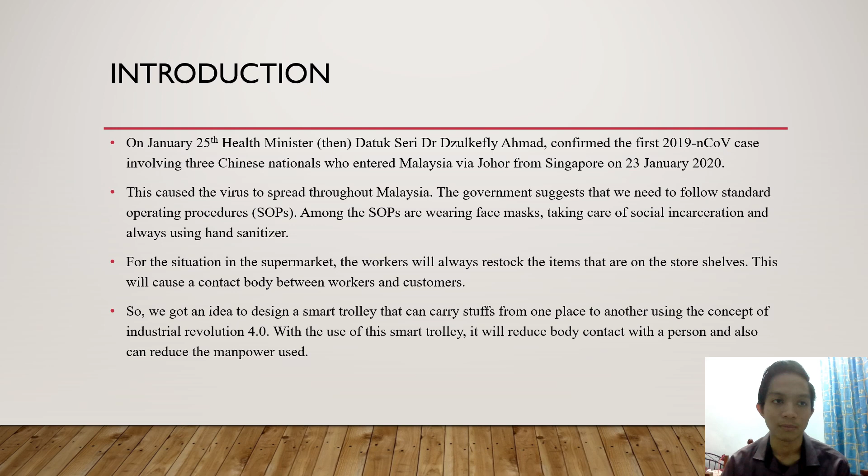So we got an idea to design a smart trolley that can carry stuff from one place to another using the concept of Industrial Revolution 4.0. With the use of this smart trolley, it will reduce body contact with a person and also can reduce manpower use. Next, the background of the problem.

In this era of modernization, most people use tools to facilitate their lives in all aspects. Humans are always looking for something to help do the heavy and difficult work in their daily affairs. Because of this, trolleys were built to help reduce the use of manpower when lifting and moving heavy goods from one place to another.

In addition, the history of the creation of the first trolley occurred in the United States when people there had difficulty carrying goods. A man named Sylvan Nathan Goldman is the creator of this trolley. Furthermore, until today, there are various types of trolleys available in the market, such as supermarket trolleys, freight trolleys, gas canister trolleys, and others.

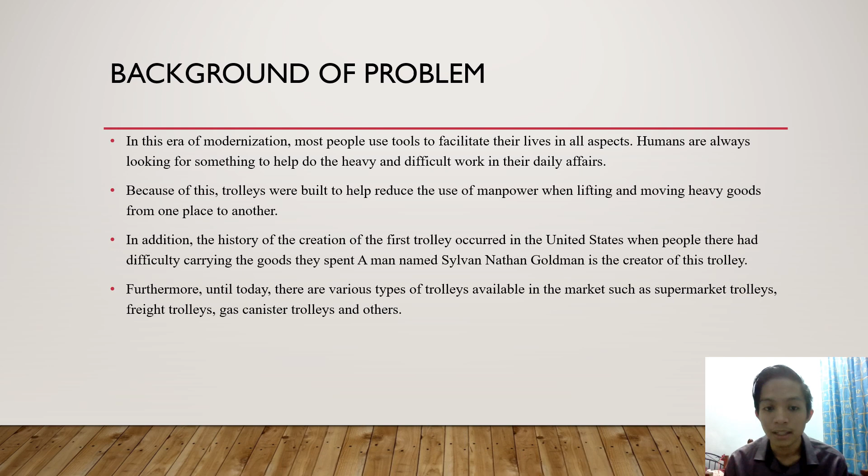Hello, Assalamualaikum, my name is Muhammad Afif Izzuddin bin Rosdi. For the problem statement, first problem is employees who have to refill items on designated shelves take a long time to carry those items. This is because when they are carrying the item, they use a trolley that requires a lot of energy to push it.

After the spread of the COVID-19 virus, the government recommended that we reduce body contact with anyone close to us. So by doing the delivery from the store to the shelf manually, it will get easily infected if the virus is carried by customers.

For the objectives, the main objective is to design a smart trolley that can carry stuff using the concept of Industrial Revolution 4.0. For the specific objective, first is to identify components for designing a smart trolley.

Second, to identify the control element for the smart trolley. Third is to analyze the design of the best smart trolley. And the last is to identify the level of convenience to be controlled.

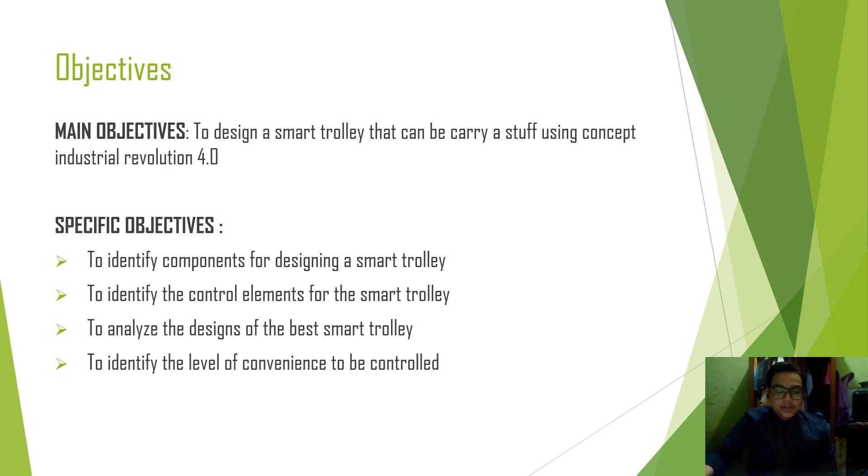Scope and limitation: first, we focus on doing our project for the workers in the supermarket. Second, the distance the detector can detect, the farthest it can reach, is as far as 100 meters. The maximum speed that can be achieved for this smart trolley is 0.8 meter per second, while the minimum speed is 0.4 meter per second.

The last is the total load that can be accommodated by the smart trolley, which is less than or equal to 100 kilograms. Expected result: first, smart trolley can work well.

Second, can move at a set speed. Third, can deliver store items safely. And last, smart trolley can be used long lasting.

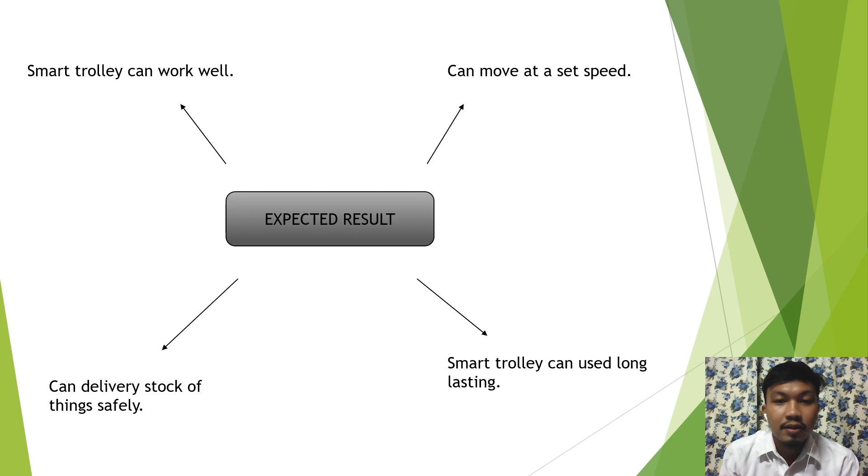How was it determined? First, from questions created using Google Form, and then we choose one project. After that, make research from problems faced, and last, make improvement from the problem.

Customer requirement: first, customer wants store of things always sufficient. Second, customer wants an uncrowded environment. And third, customer wants easy to choose items, easy to buy, and not wasting time.

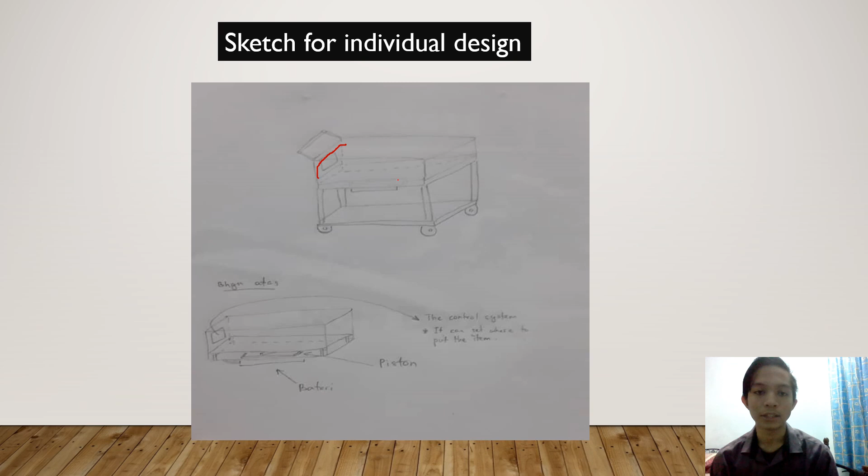This is my sketch for individual design. I control my trolley using an electronic display, and the power source will be here with the Arduino Uno. The Arduino Uno will maintain the power source for the electronic display to maintain the movement of the trolley.

For the upper part of the body, there are two pistons under the middle part that will lift any item that will be put on the middle part. When the item wants to be transferred, the piston will help the middle part push it and put the item on the shelf.

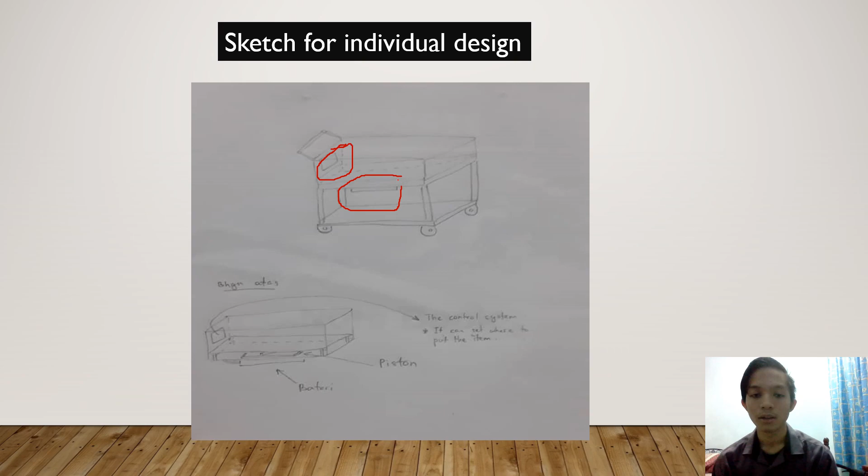For my product tree, the body is a hotel carrying food trolley. The wheel will be a rubber wheel, the electronic display will be a tab, and the control method will be Arduino Uno. The power source will be a battery, and the support item is a piston to help lift the middle part of the body. The method of movement is a hydraulic concept.

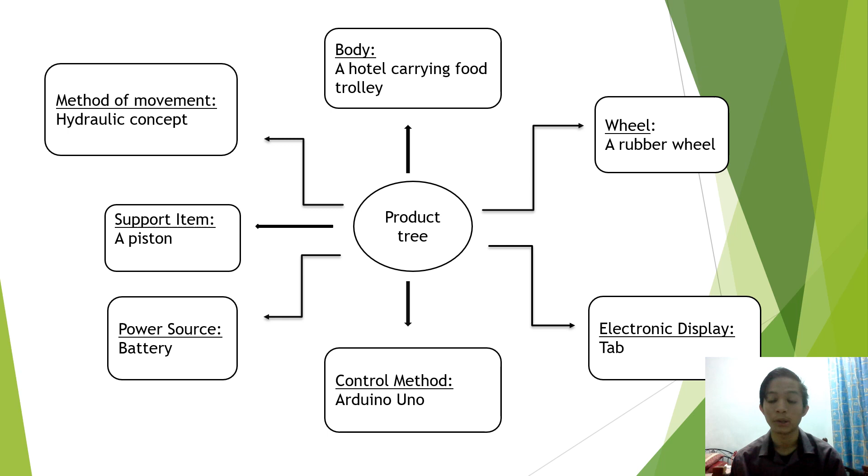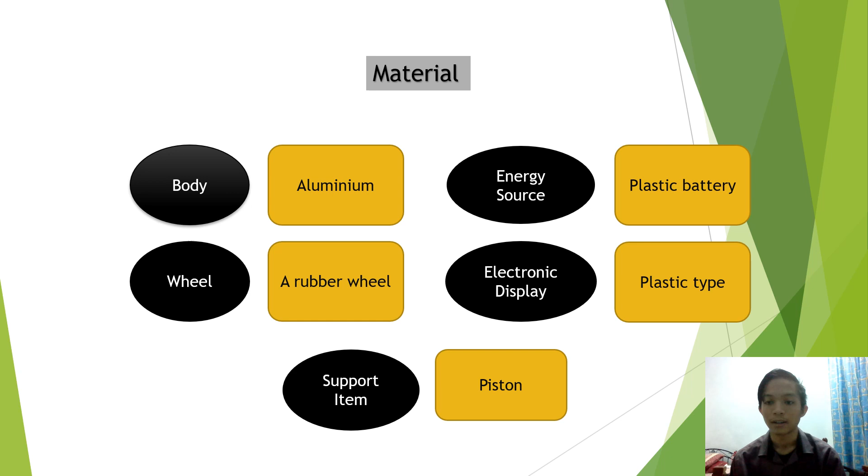The material for the body is aluminium, the wheel is a rubber wheel, the energy source is a plastic battery, the electronic display is plastic, and the support item is a piston.

Tools and technologies for fabrication: I will use 3D sketching, Inventor, a normal drill, screwdriver, strong tape, saw, and welding.

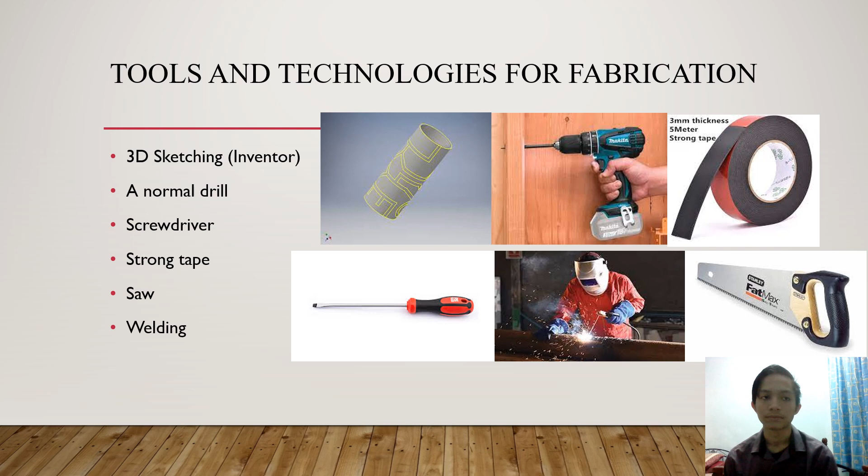Tools and technologies for testing and expected result: the screwdriver will help tighten any part that can be screwed on the trolley, and the tape will help put the electronic display on the trolley. The hammer will help hit any nail used on the trolley, and the saw is to cut the middle layer and put the piston in it, while welding combines the parts that have been cut.

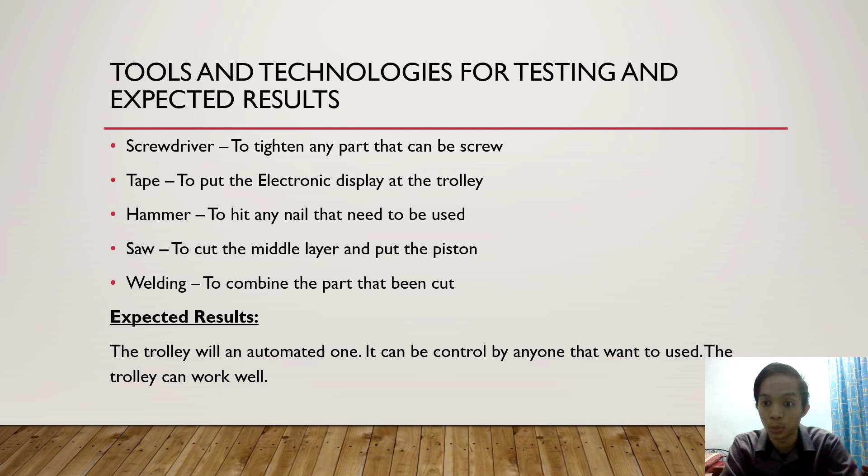The expected result: the trolley will be an automated one. It can be controlled by anyone who wants to use it, and the trolley can work well.

The project cost estimation table: first item is the hotel food trolley, quantity 1, price 161 ringgit. The Arduino Uno, quantity 1, price 105. The piston, quantity 2, price 160. The electronic display, quantity 1, price 140. The battery, quantity 3, price 60.

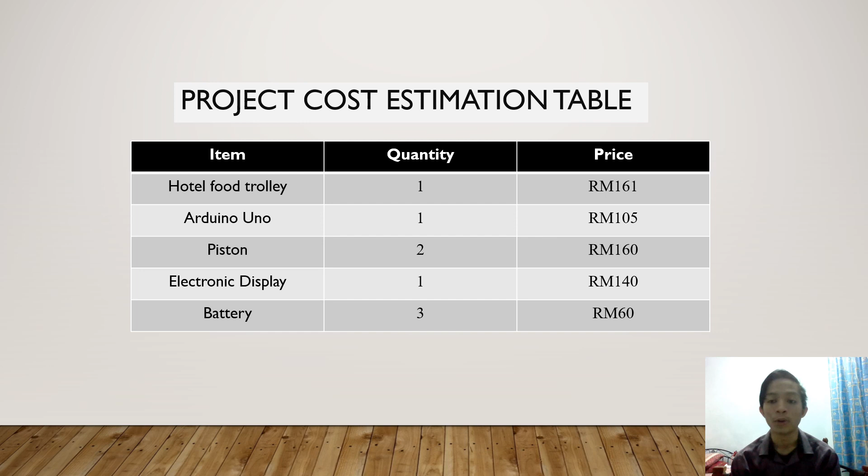The total price is 626.

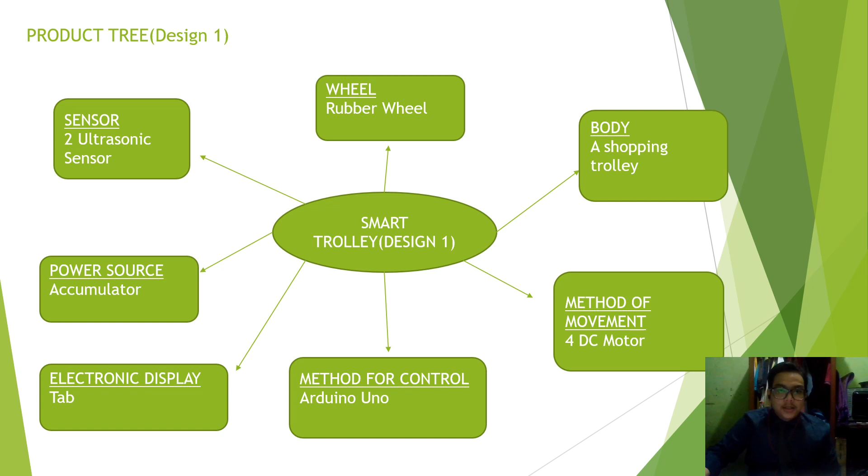This is my product tree design. For the sensor, I use two ultrasonic sensors, and the power source is an accumulator. The electronic display is a tab, and the method for control is Arduino Uno. For the method of movement, I use 4 DC motors, for the body I use a shopping trolley, and for the wheel I use a rubber wheel.

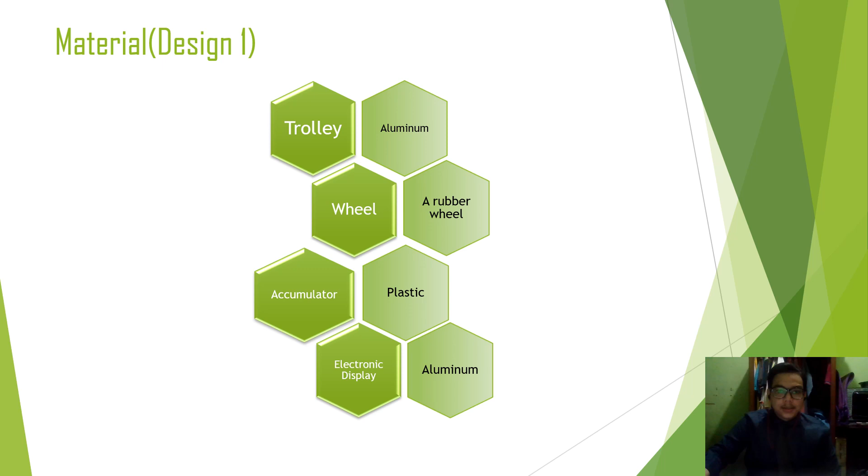The material of my design: the trolley is aluminium, the wheel is a rubber wheel, the accumulator is plastic, and the electronic display is aluminium.

This is the tools and technologies for fabrication. First, the plier to cut the wire, and screwdriver. The third is soldering iron, and the last is a drill to make a hole.

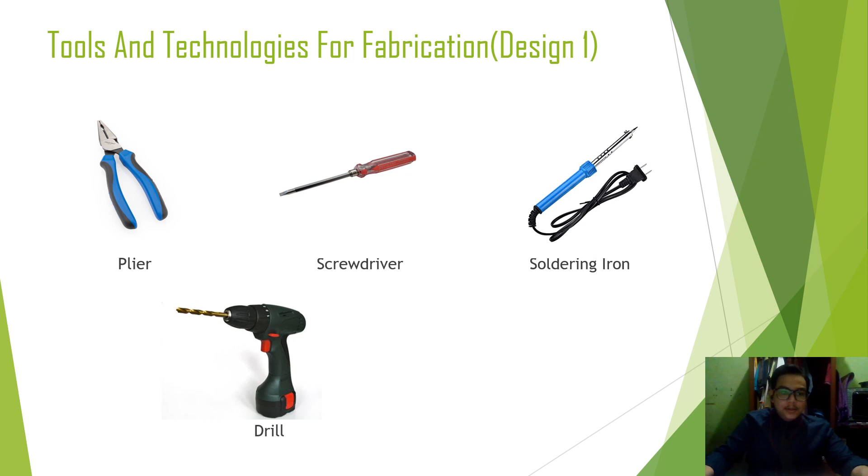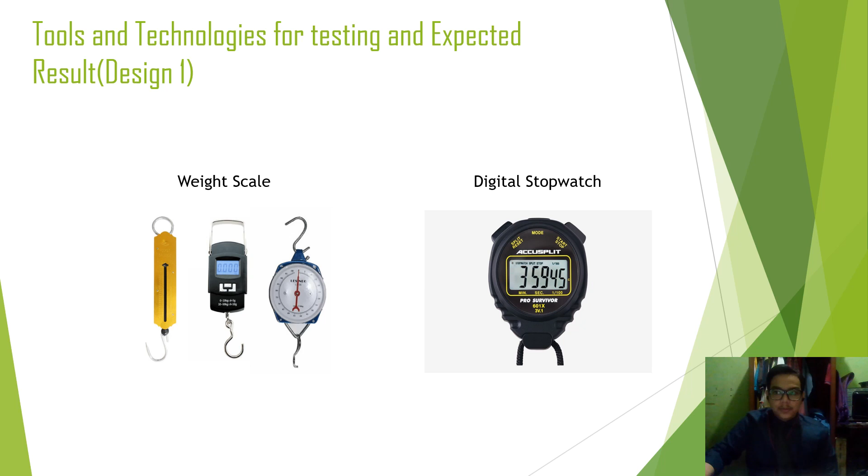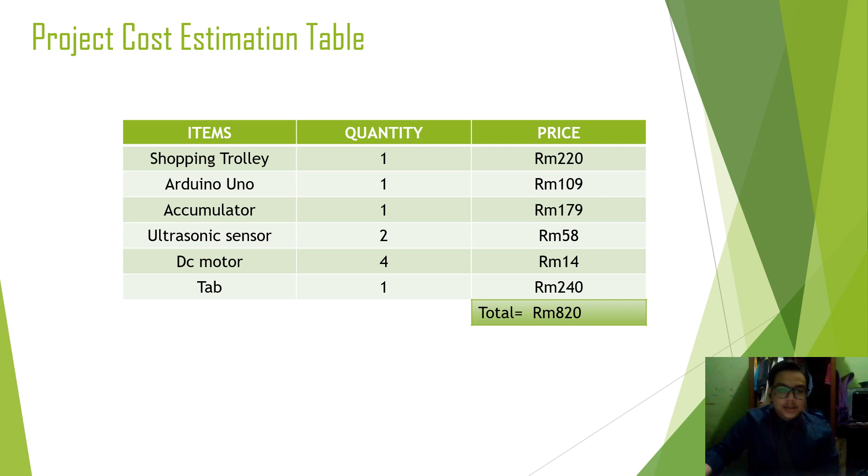The total price is 820 ringgit. This is my design project.

First, I have two baskets, battery, electronic display, body, motor, sensor, and wheel.

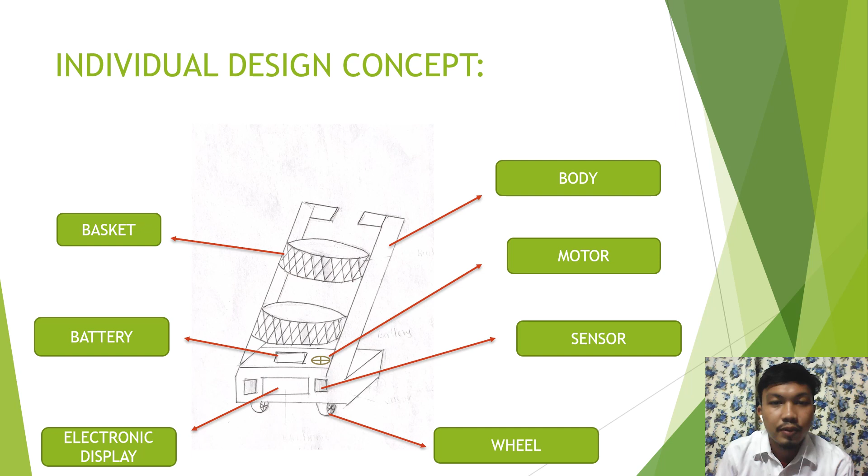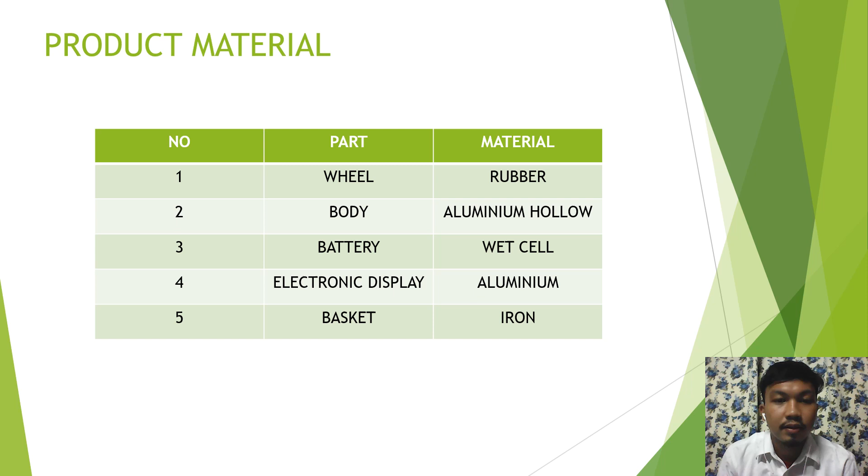Product material, first part wheel, rubber. Second, body, aluminium hollow. Third, battery, wet cell. Fourth, electronic display, aluminium. And then basket, iron.

Tools and technology for fabrication: first, I use hand tools, and then a welding machine to make the body of the smart trolley, and then a drill to make a hole, and then an angle grinder to cut the aluminium hollow.

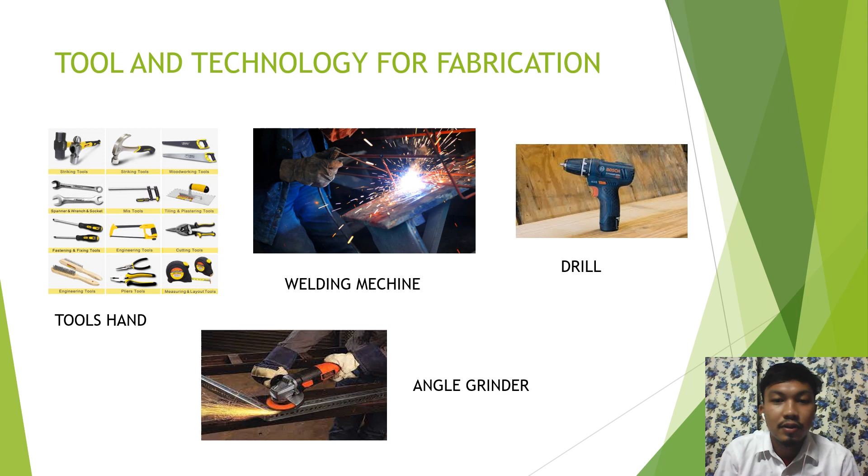Tools and technology for testing and expected result: first, digital stopwatch to measure the time of the trolley, and then digital weight scale to measure the weight.